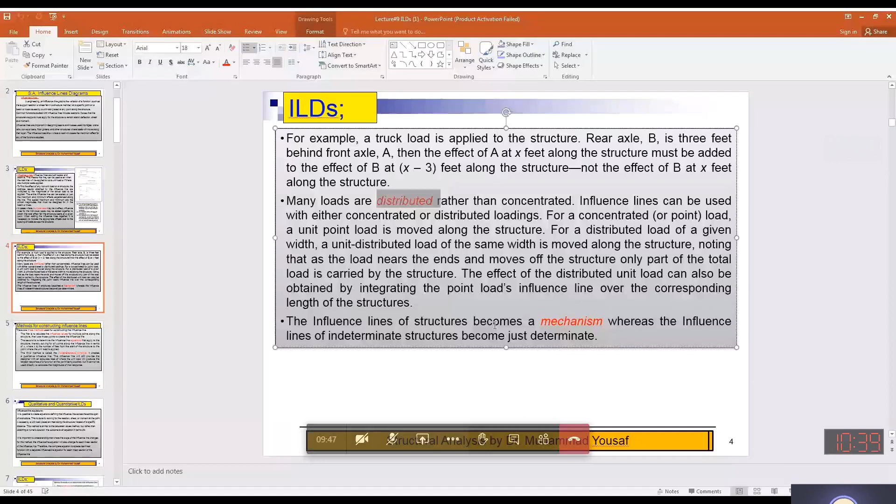Now, there are three methods, almost similar ones. The first one is labeled as influence line, influence values. What does it mean? If you just write it, even if I dictate it or not, you should write.

Like if there is simply a beam, okay? For the tabular procedure, what will I do? Just I will draw the influence line, and this will be placed at 1 meter, say 1 feet, 1 meter. Then I will find out the value. Then I will place it at 2 meter, I will find a value. Then I will place 3 meter, I will find the corresponding value. I will place it at 4, then I will find, and then very close to the next support, and the corresponding value that will be found.

So this is just in the form of a table. On the left side, there will be distance. On the right side, there will be the value of the ILD. So this will be known as influence line values, influence values, and this is known as tabular procedure or tabulation procedure.

Okay, tabular form. The other one is equation form. What does it mean? You will be developing an equation for this ILD in terms of x, in terms of distance, very similar to the bending moment equation, or very similar to the shear force diagram equation for UDL or point load. So in that case, you will be developing an equation, and just by putting the x value, the corresponding ILD can be drawn.

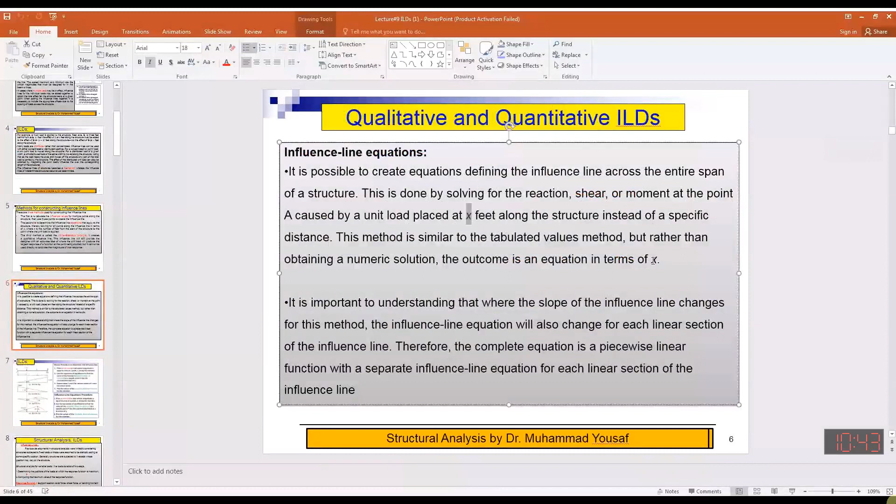In this slide there is a summary of the tabulation procedure. You will put a unit load, find out and repeat the step, use the equation of equilibrium, repeat step 1 and 2, and then tabulate the values. And this is the equation procedure.

Both are almost similar ones, but these have been labeled. I have also given this to make you clear, because these have been given in the literature, so you must be well aware of this one. This is not a new one.

Is it clear to everybody? Is it clear? Yes, sir.

1608 1608 1608. Who is this one? Repeater. 2016-08. You are being removed from the session. 1608. 1608. Yes, sir.

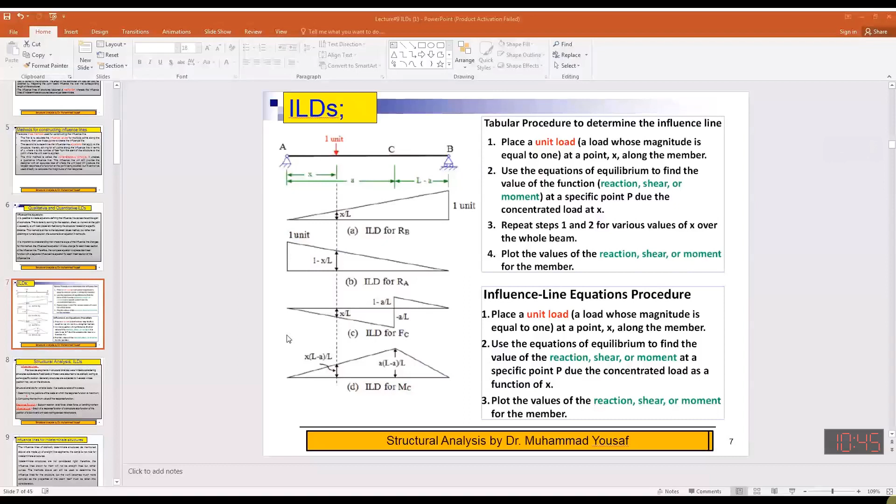What does it mean? Influence. It means that you have loaded the member, and what will be the response? That response will graphically be drawn.

To a scale or freehand, and it is known as influence line. What will be the influence of load on the beam, and what is the response? The response is in terms of reaction. So how can you judge the response of the beam or structure in terms of reaction, support reaction, shear force, bending moment, axial force? Is it okay?

Yes sir. Now listen carefully. Previous developments were related to fixed loading. And now we certainly meet with live loads to have the maximum response, because when you will be designing a member, you design it for the maximum value of the response, so that it should not fail during its lifetime.

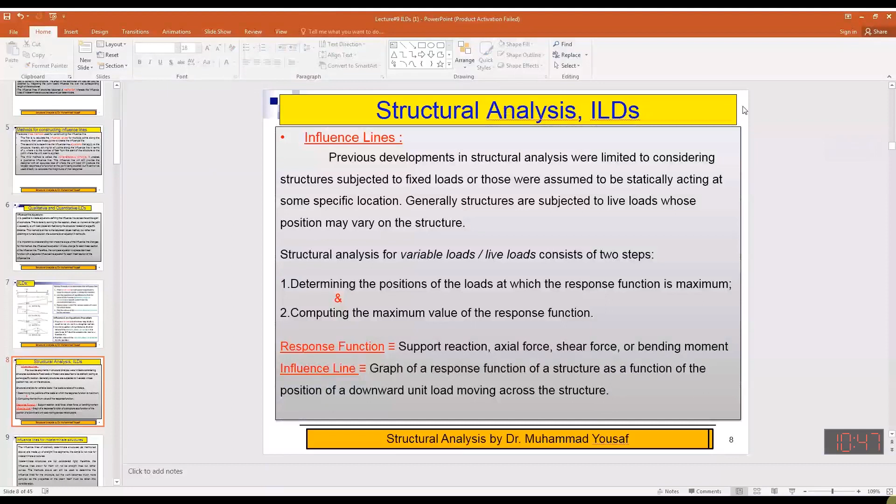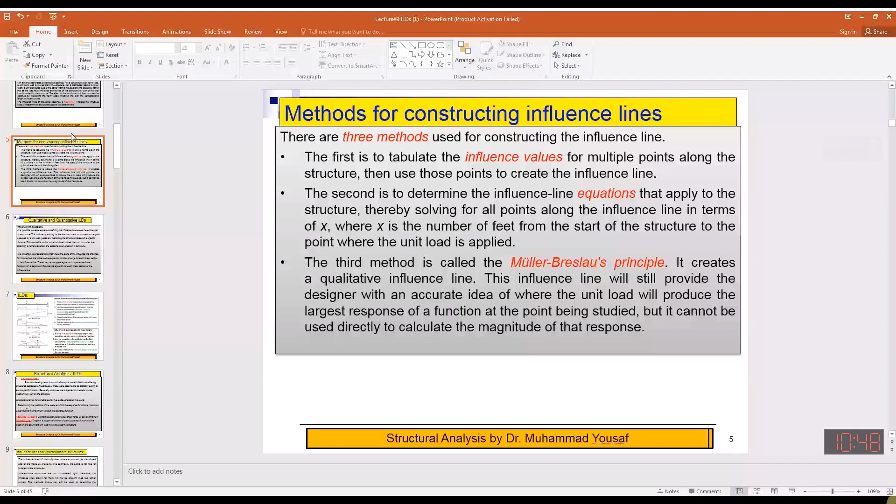Now for the statically determinate structure, you have done it earlier. You have seen that all the lines are straight, whether it is for the reaction, for the shear, or for the moment. All the lines which are developed are straight. Straight line segments will be produced. Is it okay?

CR? Yes sir. So but for indeterminate structures, because these are not considered to be rigid, influence lines will not be straight, but those will be in the form of curves. So this is the only difference, between the ILDs of determinate and indeterminate structures. For determinate structures it is a straight line; for indeterminate, there is a curvature.

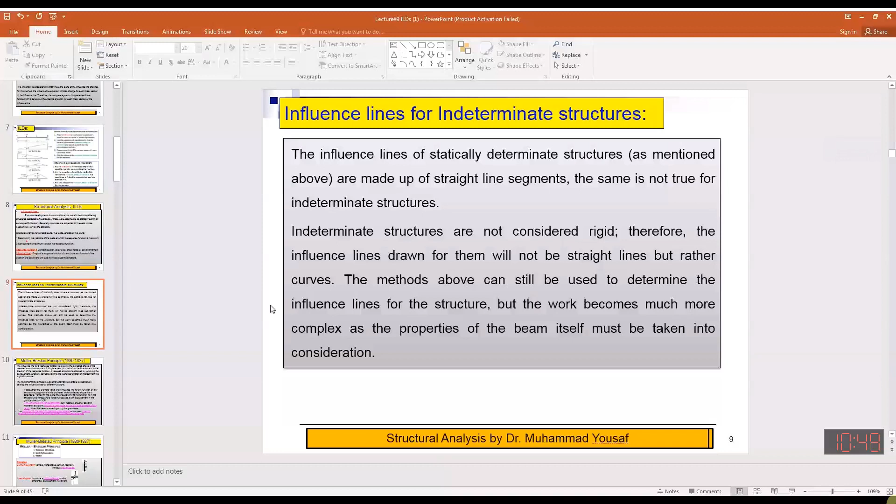Now the formal definition for the Muller-Breslau principle: the deflected shape of the released structure. When you remove the capacity of a constraint, you release the structure to move, and then you apply a load, moment, or shear, whatsoever the case. You remove the capacity by placing a cut, or by putting a hinge, removing the capacity. This is known as a released structure, obtained by removing the constraint.

The formal definition is that the ordinate value of the influence line for any function, may be shear, moment, or reaction on any structure, is proportional to the ordinates of the deflected shape. So the deflected shape is very similar to the ILD, by removing the constraint and introducing the force, which causes displacement in the positive or negative direction. In other words, the influence line of a parameter at a point is, to some scale, as the deflected shape of the beam when it is acted upon by that parameter.

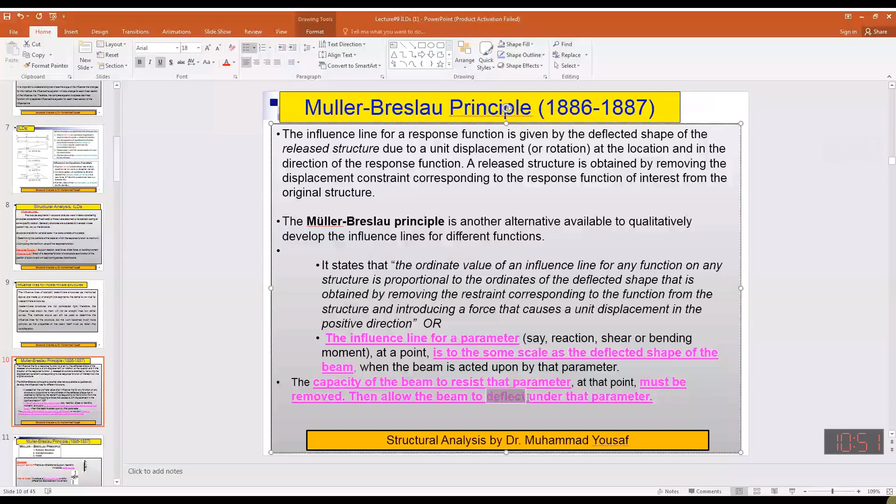So what will we do? We will remove the capacity of that parameter, and we allow the deflection. So, in general, the Muller-Breslau principle has these steps: release the structure, apply the deformation. This is a two-step procedure, and then the third one means done.

What are the releases that you will be providing? The actual structure has no releases; the support is holding the beam. So in the actual structure there is no release, but we will introduce one. When we are interested in finding the support reaction, use a roller guide. For shear, use a sliding device. For bending moment, use an internal hinge.

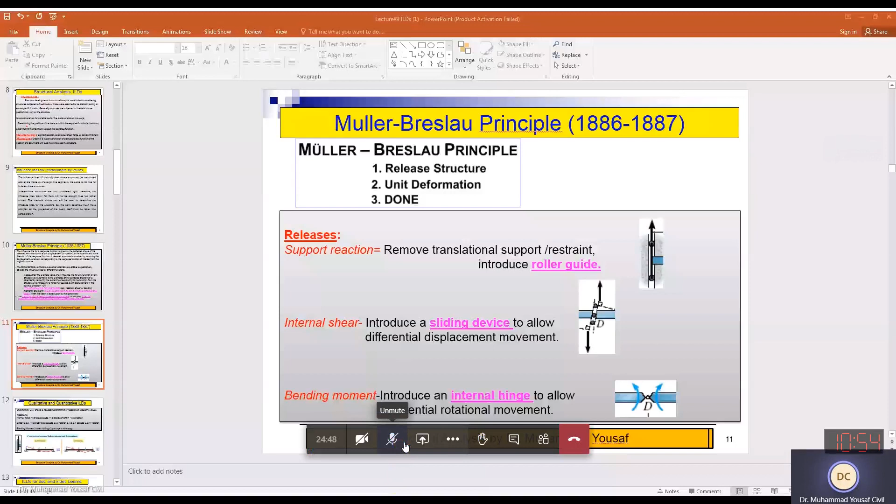So from the whole class, if anybody has any confusion, that may be pointed out please, everybody is welcomed, your queries are welcomed. CR? Yes sir, clear. Anyone else from the class? Please tell me, anyone from the class? Arima? Yes sir, is it okay? Yes sir, okay. Hamza? Is it okay, Hamza? Sir, yes, yes, welcome, welcome. Anyone else? Anyone?

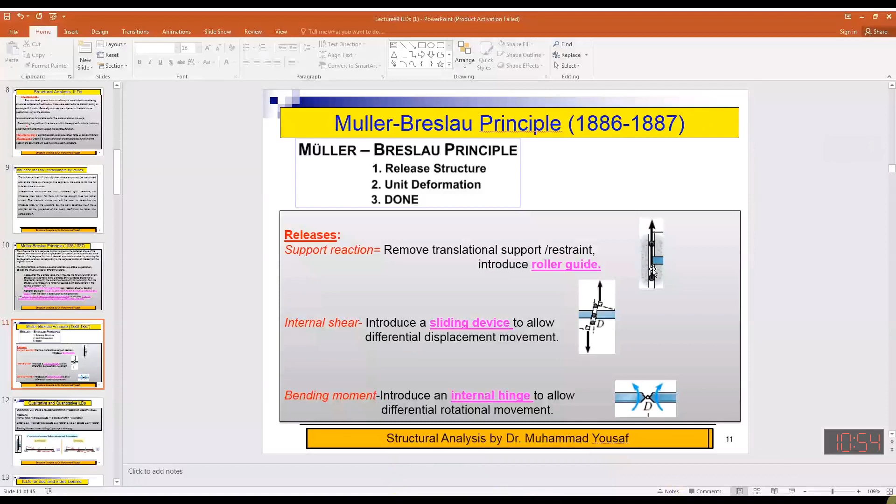So this is regarding the releases. Now this is qualitative and quantitative. If only the shape is there, it's qualitative. If values are there, it's quantitative, the ILD.

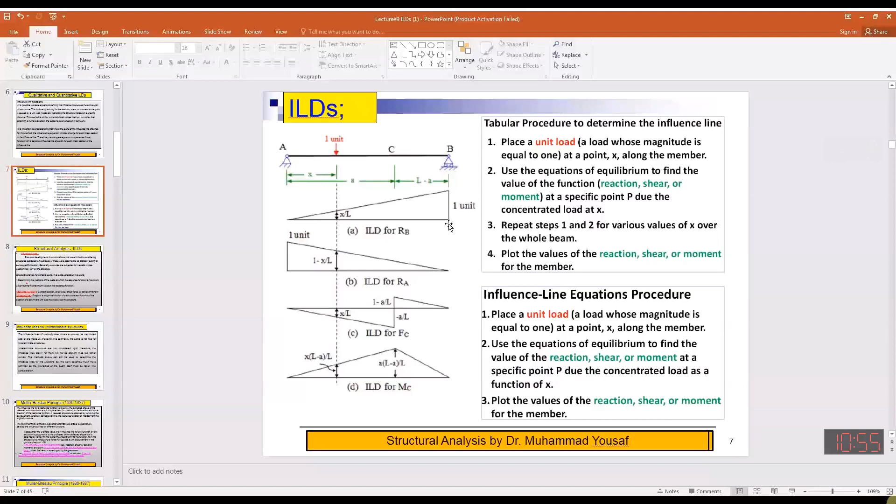Now in this case, you can see when you are looking for RA, a unit displacement was given, and this is the deflected shape of the beam. You can see this is a straight line, as you have seen in your previous topics for ESA.

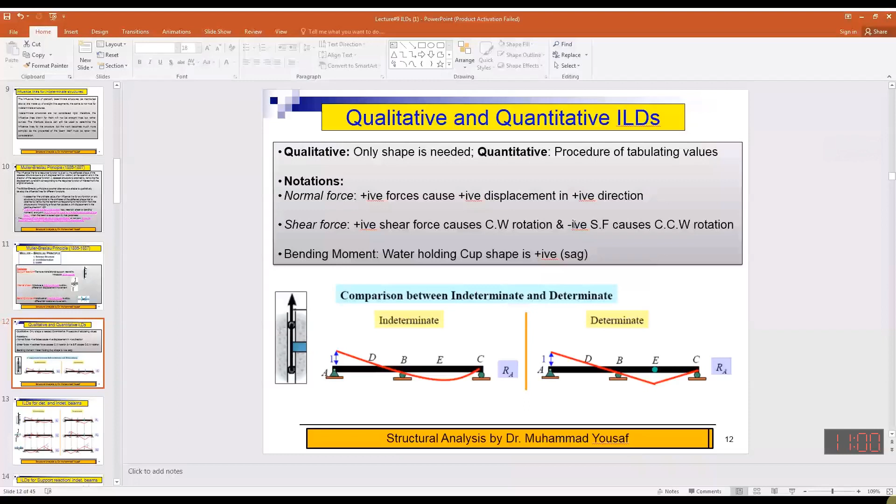And the description over there: shear force is positive if rotation is clockwise, and it is negative if it is creating counterclockwise rotation. You can see this curvature is like a cup almost, and this is moving in general counterclockwise direction, and this is moving in clockwise direction. So this is positive, so this is negative.

Similarly, at this place you have introduced this release. This release has been introduced at point D.

Then for bending moment, if I say at point E, then in case of determinate beam, to make it determinate, this hinge has been transferred to this one. I need the moment at E just to make it dissimilar from the previous beams. I need moment ILD at E.

It has been made determinate by introducing a hinge at this point, and a clockwise and a counterclockwise moment couple has been applied, and this is the deflected shape. You can see all the segments of the beam are straight enough. But this is not the case in case of indeterminate.

Over there, this couple moment has been applied at this point, and this is the assumption of the shape of the segments of the beam. This is like this one, and this is curvature.

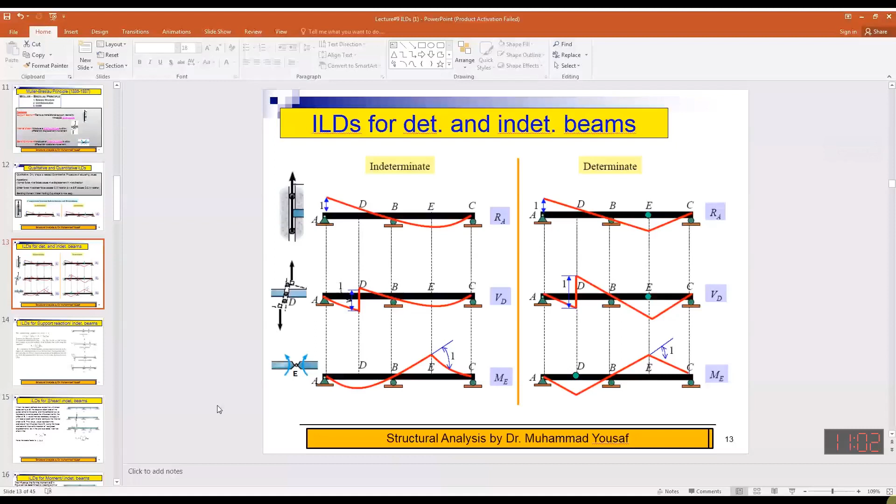Is it okay, everybody? Yes, sir. No. Yes, sir. Shabash. Welcome.

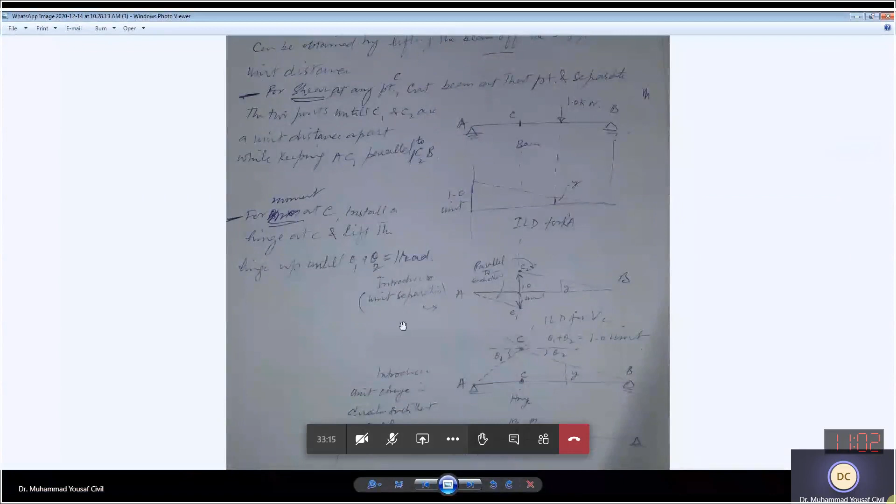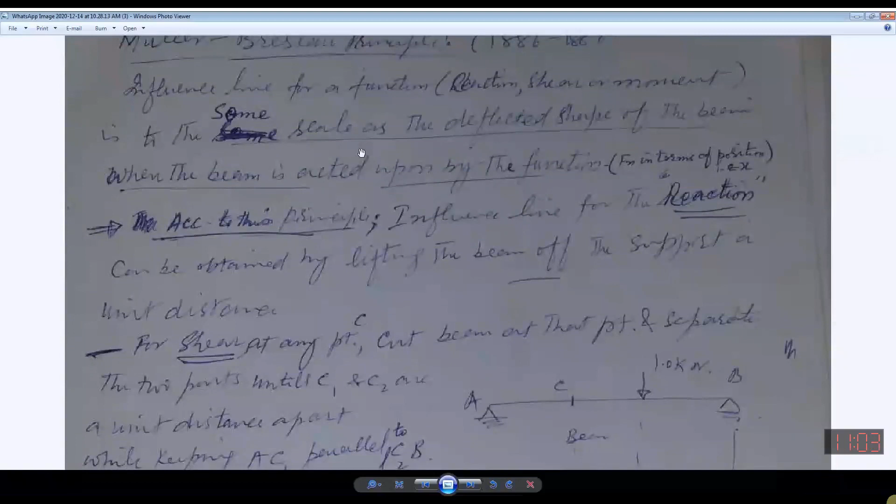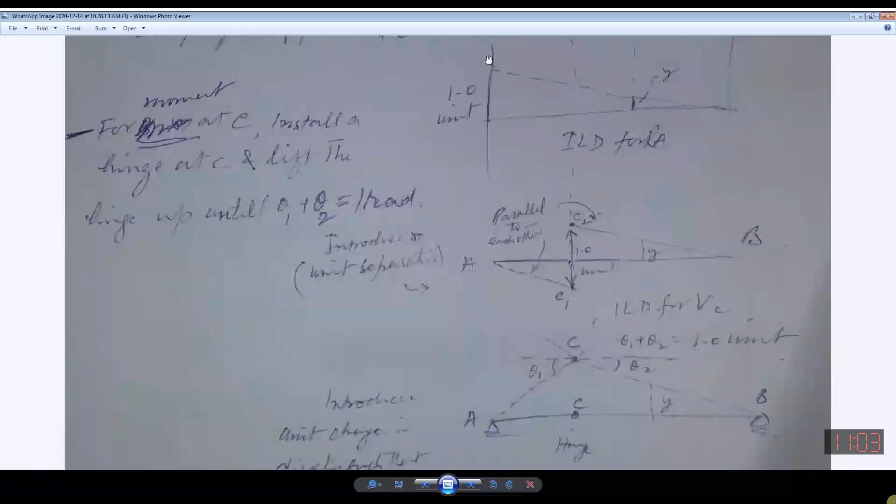Now, can you see this one? Yes, sir. Yes, sir. So in this case, this is just the repetition of your previous knowledge for the determinate beam. This is determinate, and you can see how you can draw the ILD for the reaction, ILD for shear, ILD for the moment. Okay.

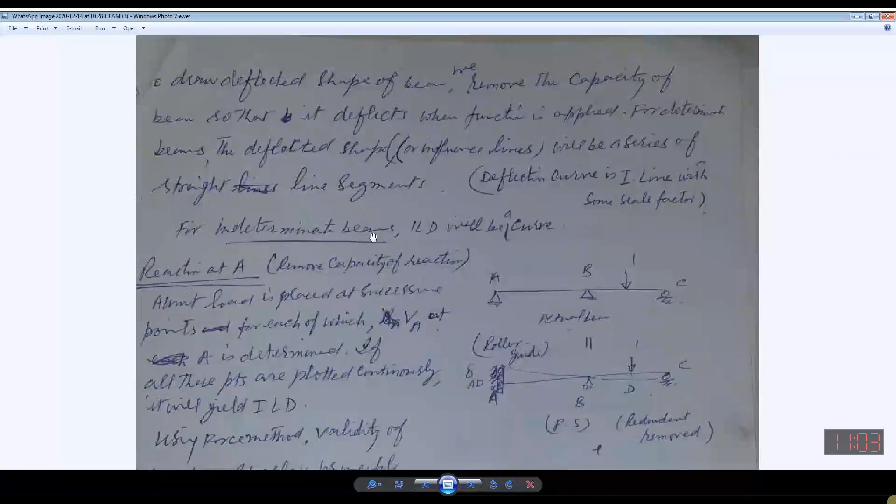Then, in case of reaction, now this is the practical utility of the Muller-Breslau principle when you are interested in finding out the support reaction. Over there you can see, just listen it carefully. Everything is written over there, and I have explained it earlier. No need to go through this one.

Now you can see this is a beam, and you can see that this is indeterminate to first degree. There is a roller, there is a hinge, there is a roller. So here two forces, inner hinge, this acts like a roller. It should be noted, it acts like a roller. This is very similar, or you can also place a roller over there. So in this case, you can see that this is an indeterminate beam.

So in this case, what I do, this is the actual structure, and you will be following the force method. What is the procedure in the force method? In force method, you divide, develop from the original structure, you get a primary structure, and then another auxiliary structure. In the primary structure, you just remove the redundant, and in the auxiliary structure, you apply the redundant. Is it okay? Am I right? Yes, sir.

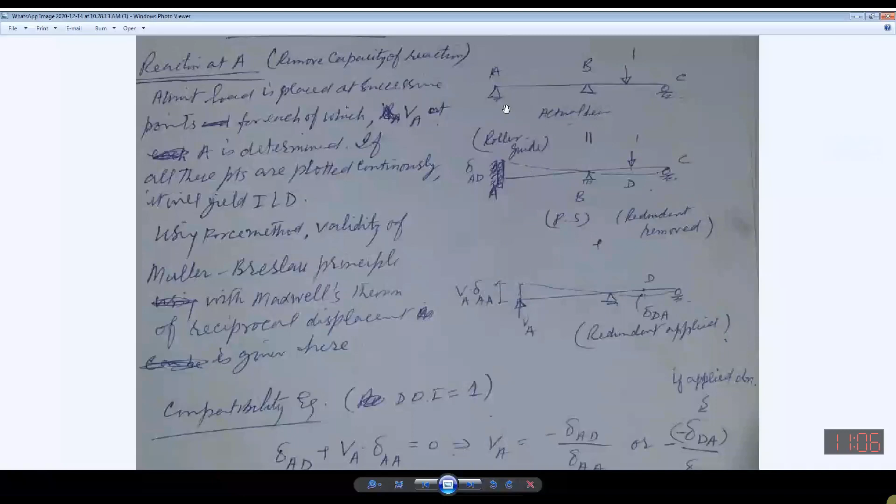Now in this case, you have released it. You can see this, you have released it. It means this is removed. One action is removed, one response is removed in vertical direction.

What does it mean? At this support, at this location, you have introduced a roller guide. Roller guide, what does it mean? It can allow the movement of the beam in this direction, but not in this direction. This is roller guide, vertical roller placed here.

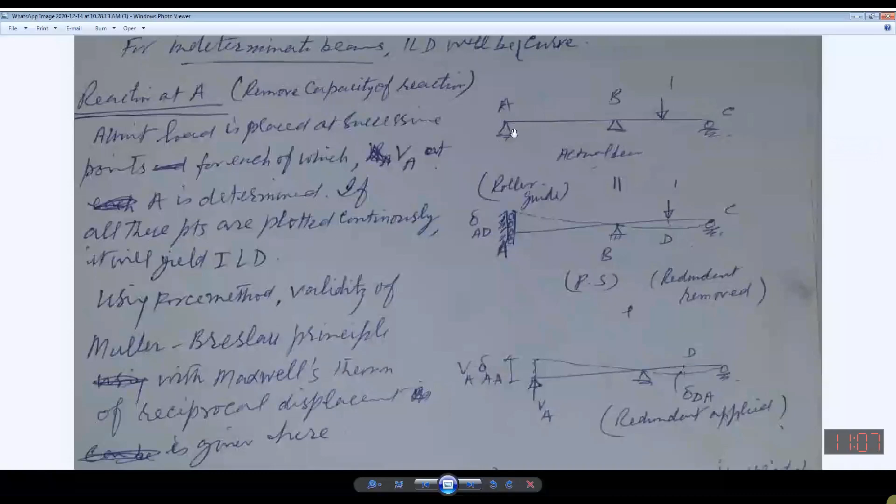So this is roller guide. You will be introducing a roller guide. So you can see you have removed one redundant.

VA, vertical force, VA. Plus auxiliary structure, you have applied VA. Okay?

Now, under its effect, under applied loading, this will be moving upward. And under this VA, it will be moving, should have been moving downward. The sum of these displacements must be 0.

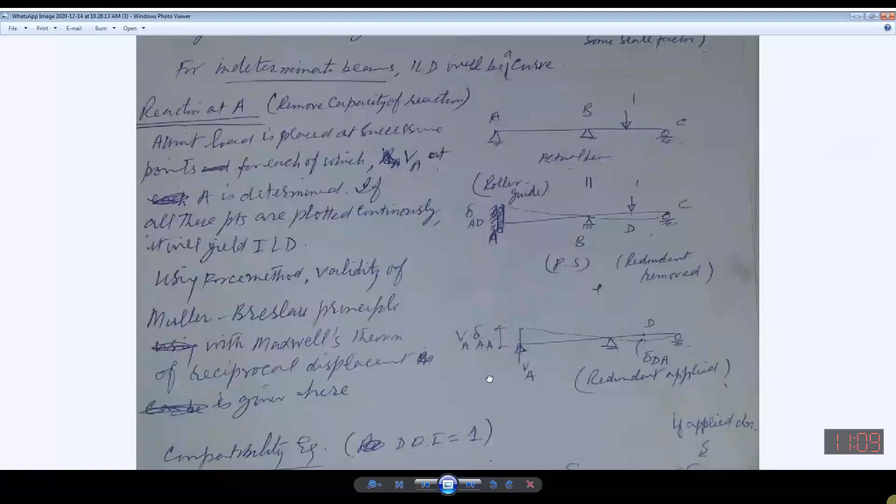What does it mean? If it is delta AD, then plus it will be VA into delta AA. Due to VA, this deformation will be VA into delta AA. This is well known to you.

At the start, I developed this expression. Total summation must be 0. And from this, we can have unknown value VA, and it will be equal to minus delta AD over delta AA.

Now, using the principle of this, according to force method, this is also in accordance with the principle of law of superposition, principle of superposition, the summation must be equal to 0.

If I apply Maxwell theorem, then the displacement by this force at this one, and displacement at this D due to VA, both are same.

Due to, sorry, unit load. If I apply over there unit load, and actual load whatever is acting here, the displacement due to that here and due to the unit load there are the same.

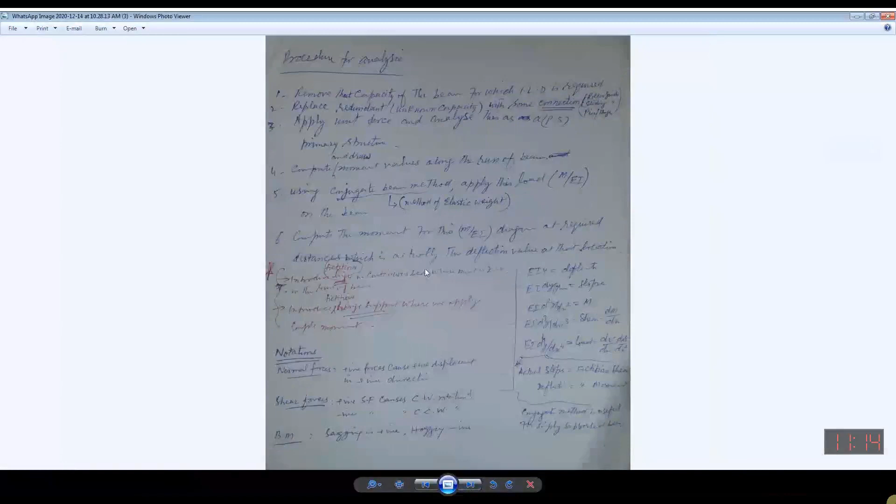A similar expression has been given for the support reaction, as I told you earlier.

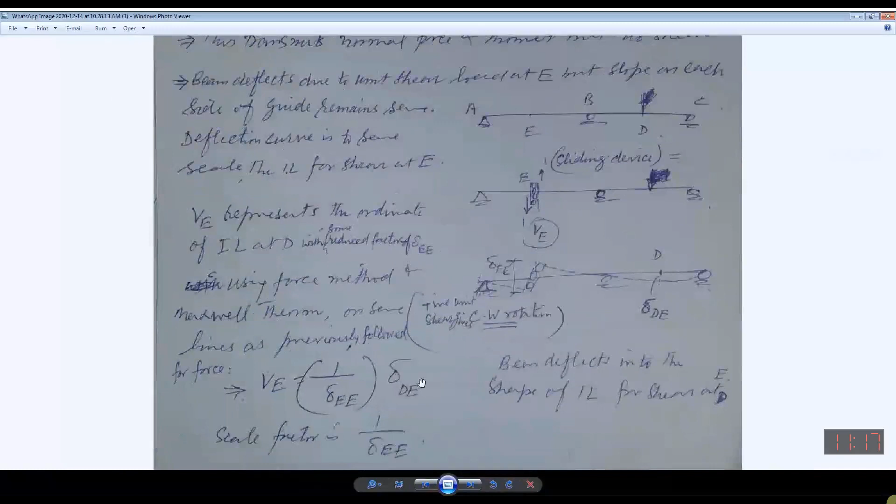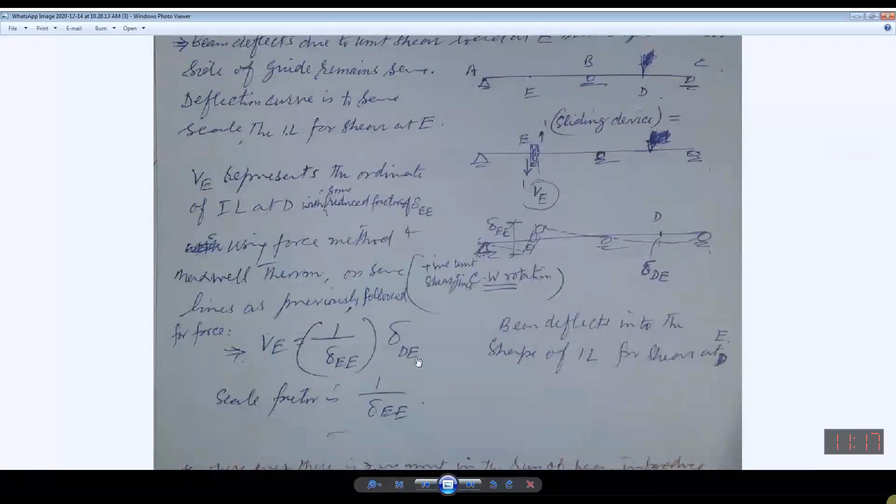VE, shear force at point E, is equal to delta DE, meaning deflection at any other point where the actual loading is applied, that is in the primary structure.

This is the D point. So at that point, deflection at D due to force at E, shear at E, which you have done, will be multiplied by a scale factor of 1 over delta EE.

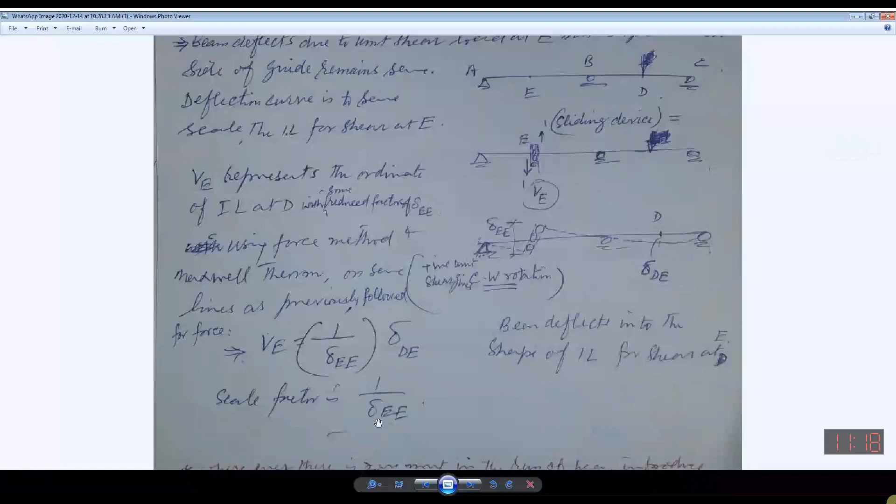Then for the moment, same thing, I need moment ILD at point E. I will introduce a hinge. When a hinge is provided, I will give the rotational displacement using a couple of moments this way, and you have done it earlier in your ESA subject.

On the same lines, you will find the moment at point E. It will be the deflection at D due to moment at E, multiplied by a scale factor, which is the rotation at E due to moment at E. So this is all about the ILD for indeterminate structures.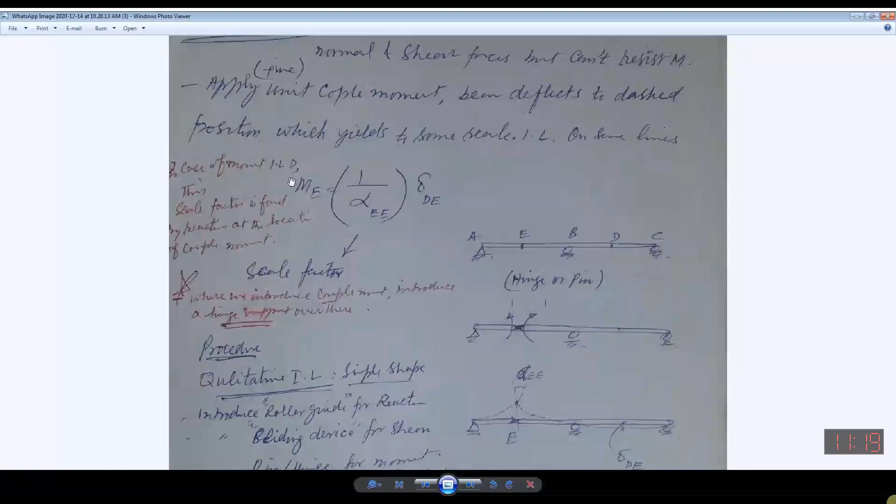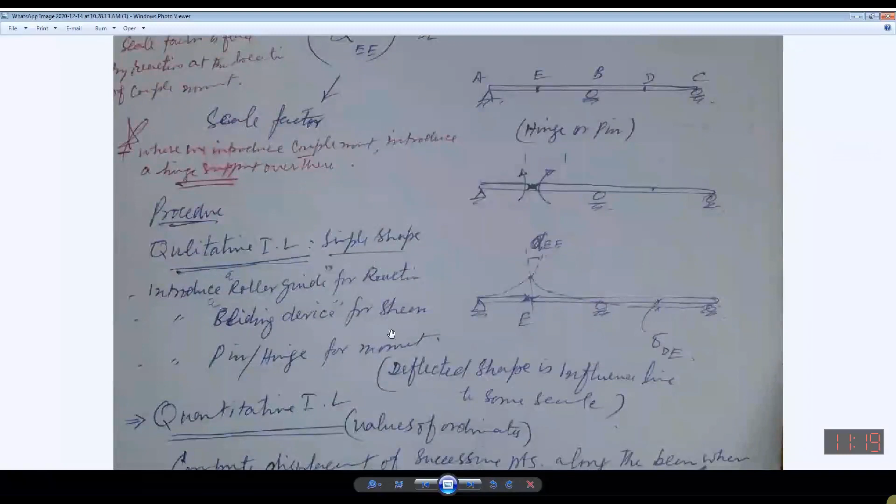Now for qualitative ILD, introduce a roller guide for reaction, a sliding device for shear, a pin for moment. And if you are to find the quantitative value, use expressions like this one.

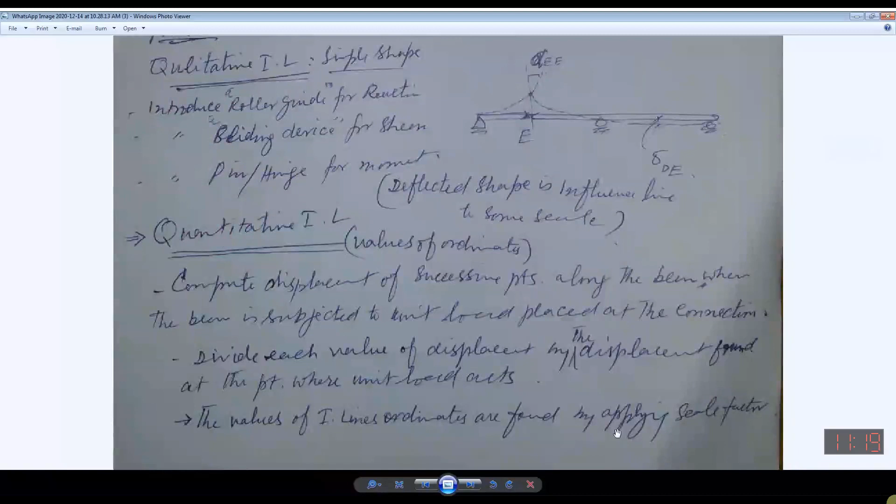Just put the values, divide each value by the displacement found at the point where the unit load is applied. You are going to divide this displacement by that displacement, and the value of the ordinate will be found. So this is regarding the basic procedure to draw the ILD.

using the Muller-Breslau principle, and applying the force method along with the reciprocal displacement method and the law of superposition. All these four to five approaches have been summed up in this single topic.

So if you are having any difficulty or facing difficulty, you can tell me.

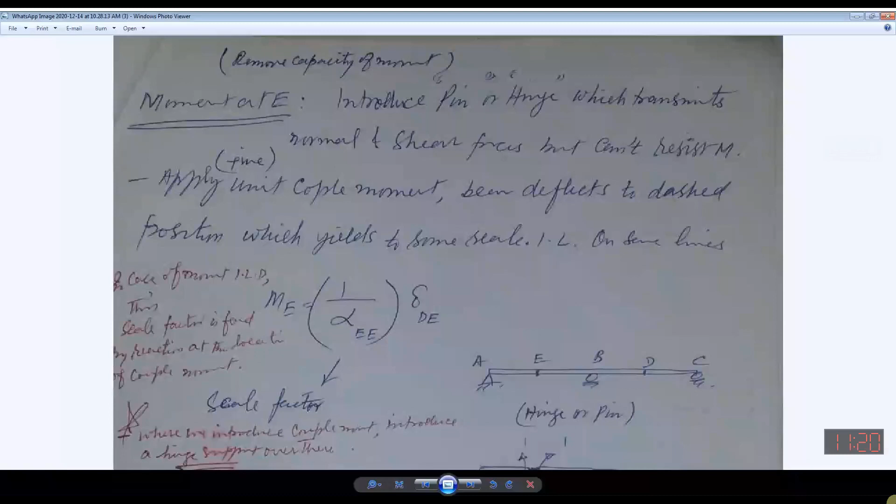So you can see this, and now once again I move back to the original slides.

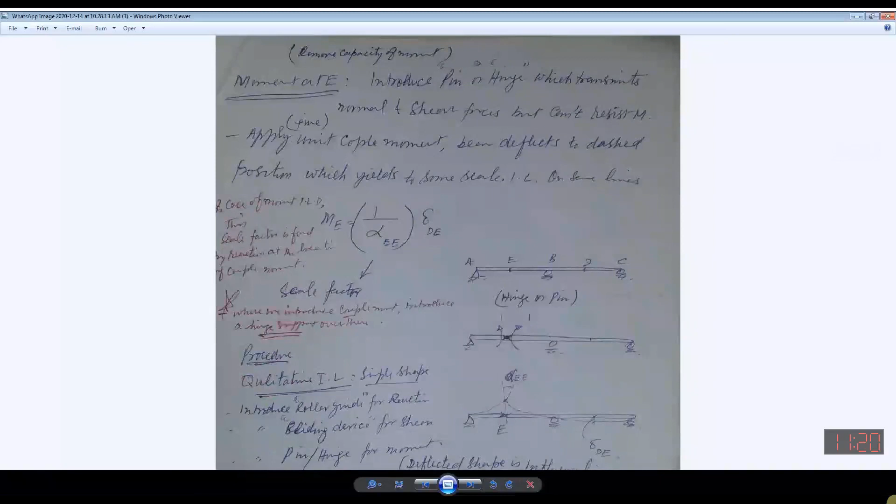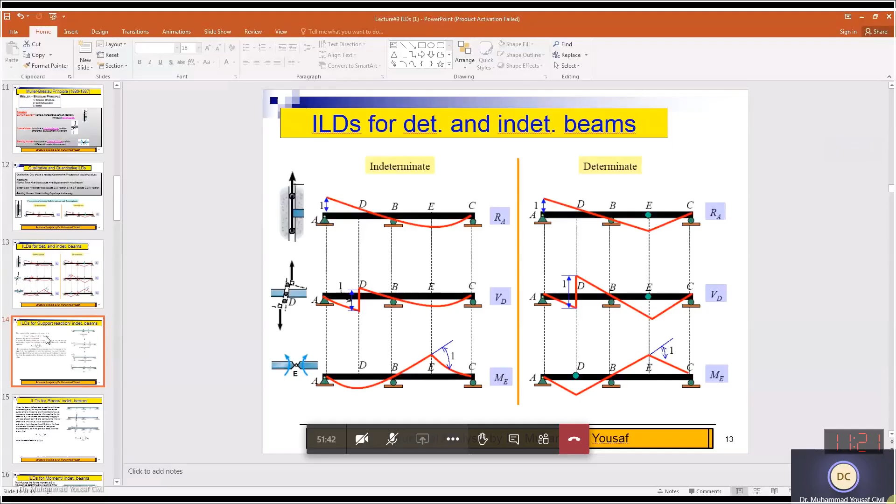Okay, now the same thing has been explained over there. You can see that was the simplest form.

In the previous slides I have explained it, and the same thing is given in the book. You can see, this unit force has been applied.

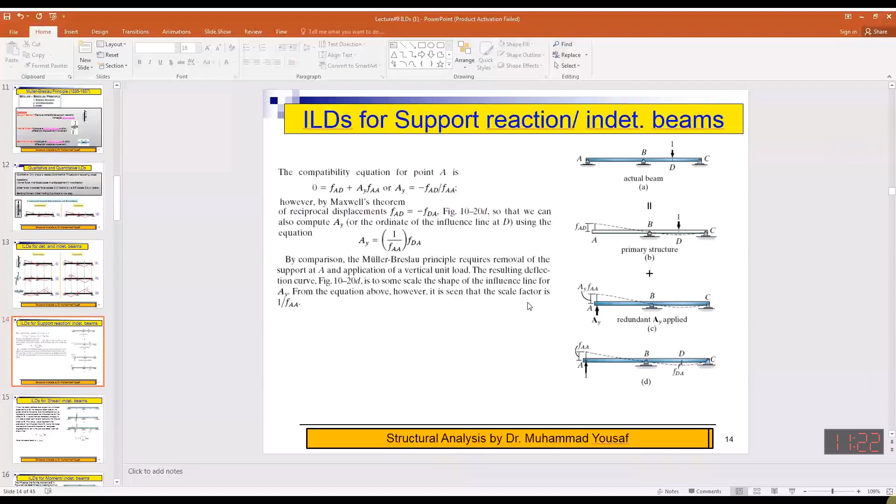Similarly, this is for shear force. You can see the original shape. This is also the scale factor, and this is the deflection. You can see this one.

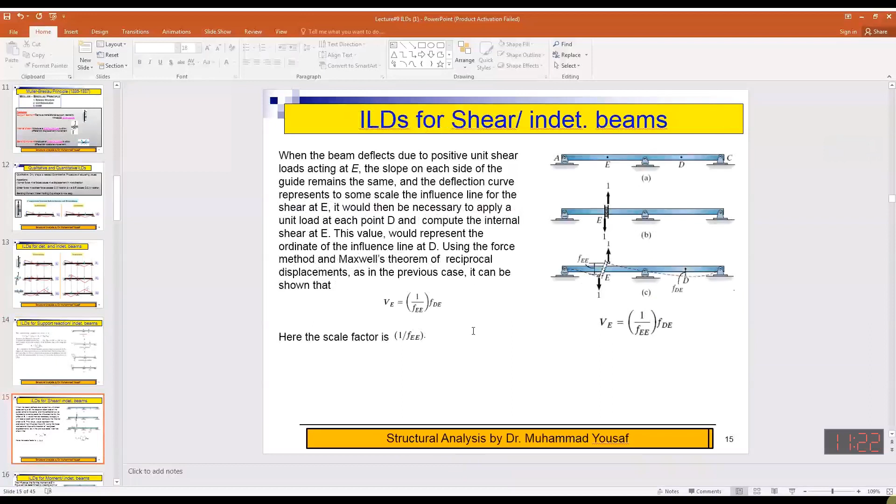Similarly, for the moment, this is the scale factor, and all these things are over there. Let me make it a little bit bigger. Just try to go through these, please.

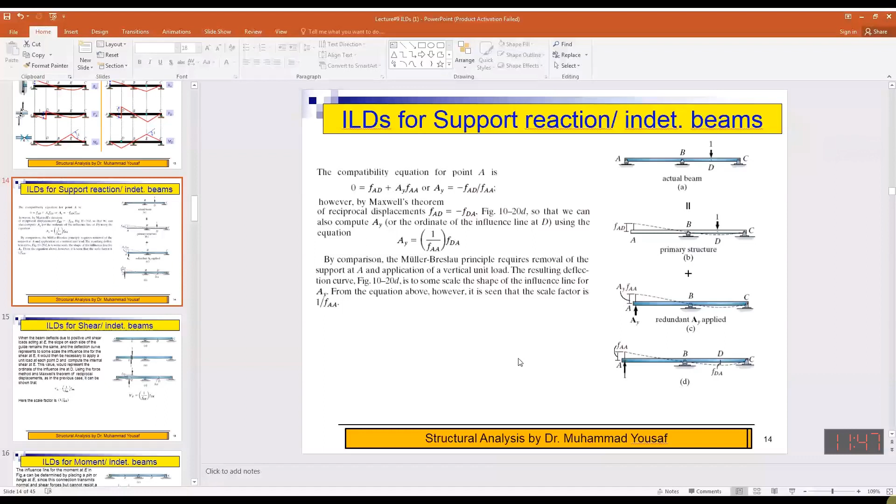Yes sir, have you seen this? You will be shared with these slides. And this is qualitative ILD, you should see this too. For having the reaction at A, this will be the deflected shape, and you can see this is the deflected shape, and this is ILD, qualitative ILD for RA.

If you are interested in finding out the ILD for RC, then you will be applying a force. This will be the deflected shape. And in all the cases, you can see that there is a curvature. And this is the difference.

Curvature will be there for indeterminate structures, and straight segments will be there for determinate structures. This is for shear force. This is negative bending moment. This is positive, and you can see the shape of the beams, and also this one.

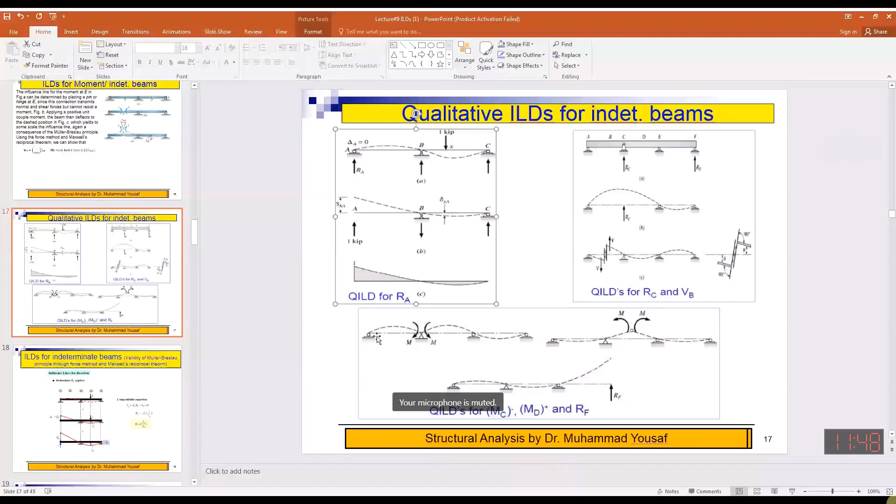So all the things have been explained, and similarly this is also the similar one with some other description or notations. F has been used, F means deflection. The same thing has been given over there.

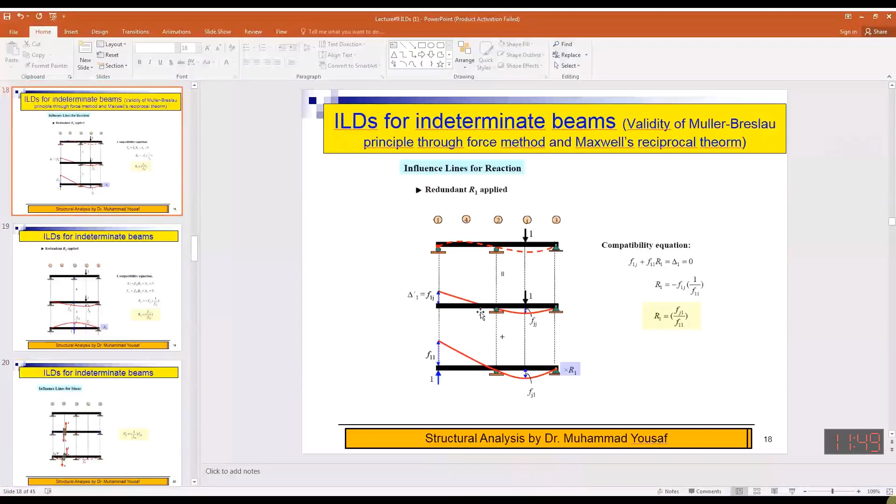This is for reaction R1, this is for R2. R2 is the middle support. You can see you have given the displacement. This will be the deflected shape, and this is for under the unit load.

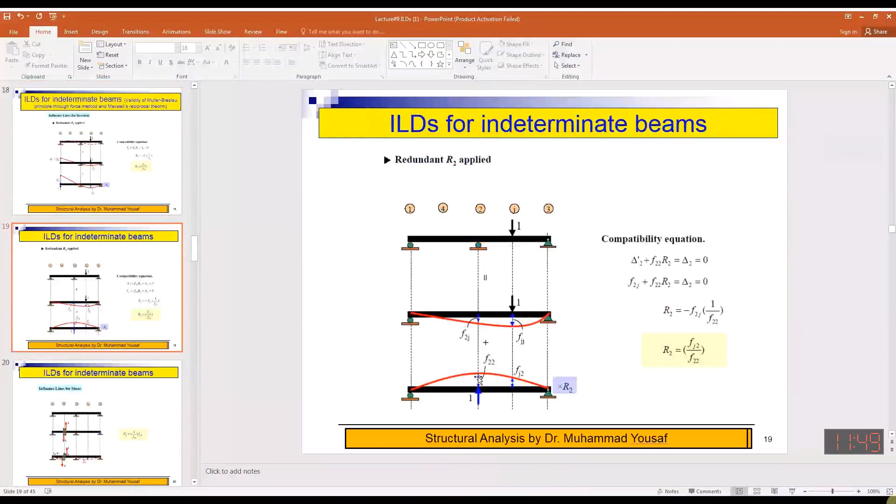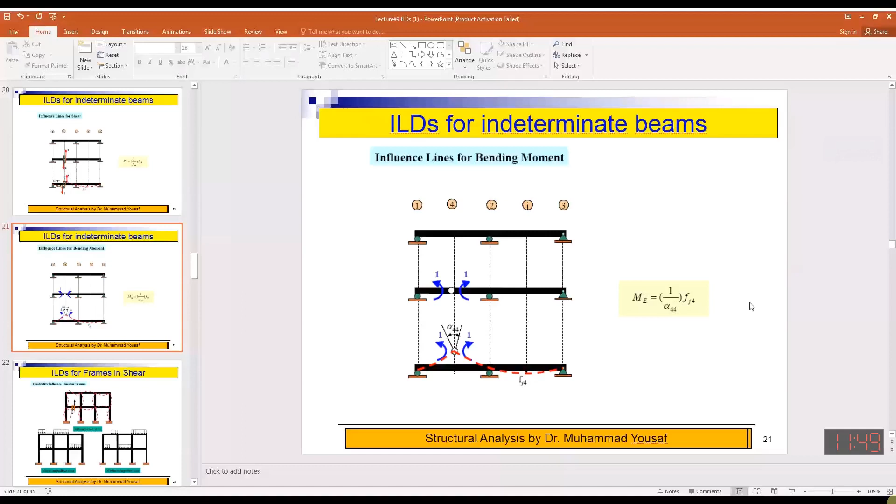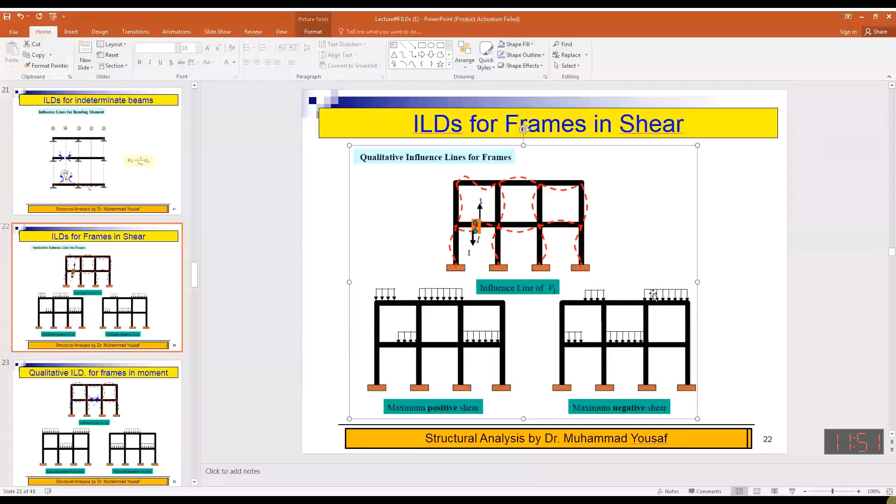Now, for the solution of this one, have you gone through the conjugate beam method, CR?